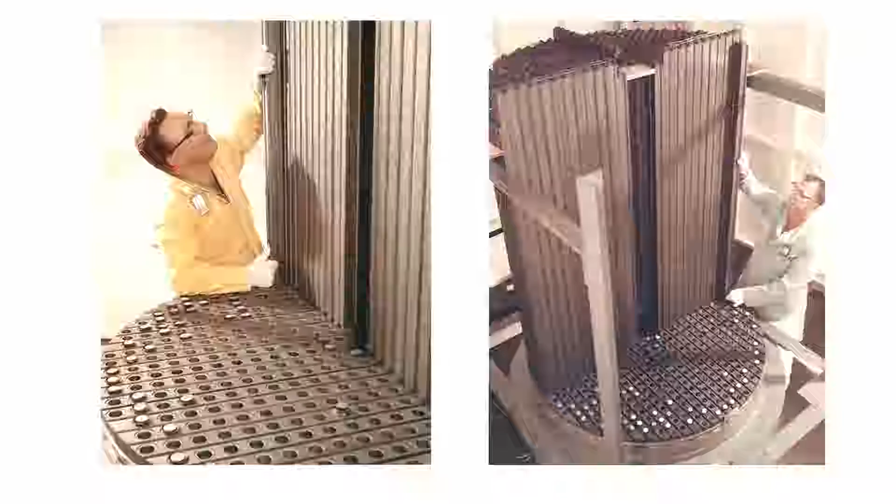This is an old facility. Look down before you walk. That's our biggest hazard here right now. Oh my goodness. Yes, yes. I've modeled this shape neutronically. It is like a lead pencil, isn't it? Yeah, it is. Basically. Graphite.

We just returned from a trip to Oak Ridge National Laboratories, and one of the exciting things that the Baroness and I got to do was to tour the Molten-Salt Reactor Experiment, which was one of these type of reactors that was built in the 1960s. It was an experiment that demonstrated many of the key technologies, although there are some that still remain to be demonstrated.

How long have you been here? I've been here since 1992. There are very few people in mid-career in nuclear energy right now because there's a huge trough. We have a large number of students coming back into it. Well, the context has changed completely, hasn't it? It has. Yeah, when we went into nuclear energy, they said, "What are you, nuts? There's no future in that." And it really didn't matter. We say it's the true believers.

So you could have a molten salt reactor that you could walk around on. Oh, this is so cool. You guys have got to try this. Oh, goodness, that makes you feel really weird. There's something in front of me here, it feels like.

I was in 7th grade. I read an Isaac Asimov story about the implications of what free energy would do. And I sort of knew I was going to be an engineer or scientist just from day one. And this sort of said, okay, what can you do to make a difference? And that was where I said advanced nuclear power was something that could make a difference, and that low cost clean energy could make a huge difference to society. If I'm going to have to get up every day for 50 or 60 years working on something, well, it ought to be something I believe in.

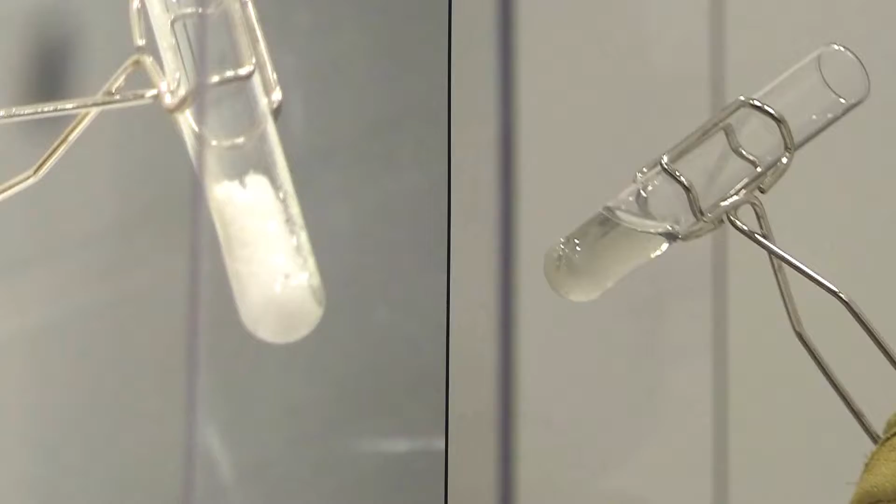Liquid salts are an outstanding heat transfer media. It really doesn't matter what you're going to be transferring heat for, whether this be a solar power tower, a salt-cooled reactor or a molten salt reactor. Viscosity on it is 30 times larger, but water's very low viscosity, so it's still a very low viscosity fluid. Some people might imagine this is quite a gloopy or slow-moving liquid, but it's actually quite fluid. You're right. It does go through a melt much like a glass as opposed to water, which doesn't quite do that. So we want to run it 100 C or so above this, so it does flow nicely.

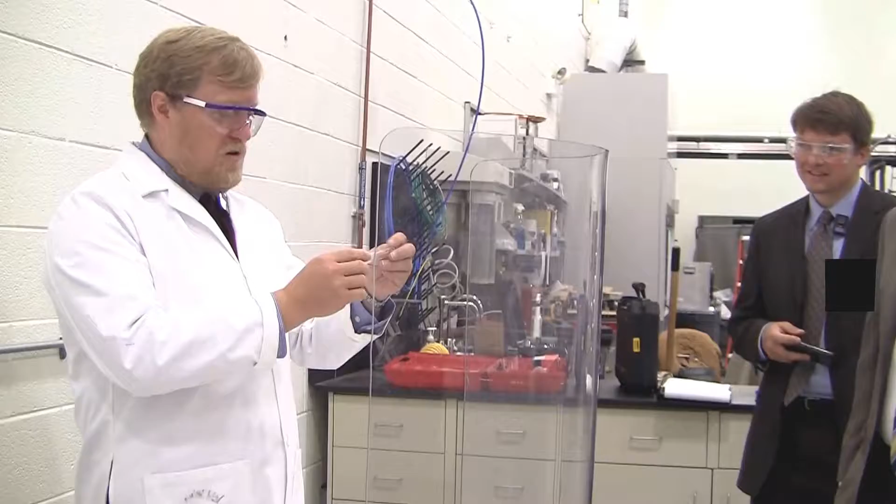If you repeat doing things in here, you can see you start to etch the glass just a little bit. So what we have to do in a reactor is keep things very highly reducing. If you put extra beryllium in there, it's essentially giving you a preferred spot to rust. And so this is all about controlling the potential corrosion of the salts within any vessel that you put it in.

Yep, the iron in some of the alloys is more soluble at higher temperatures, and so in your heat exchanger where it's at hot temperatures, you will get metals taken into solution, and then when it gets to the colder end, it'll redeposit, and so you can self-plug your heat exchangers, which you would very much like not to do. And your technique to avoid that is keep everything very well reduced so it doesn't corrode in the first place. You'll make it lousy, but there are no strong chemical reactions that are going to take place between the salt and even direct contact with water.

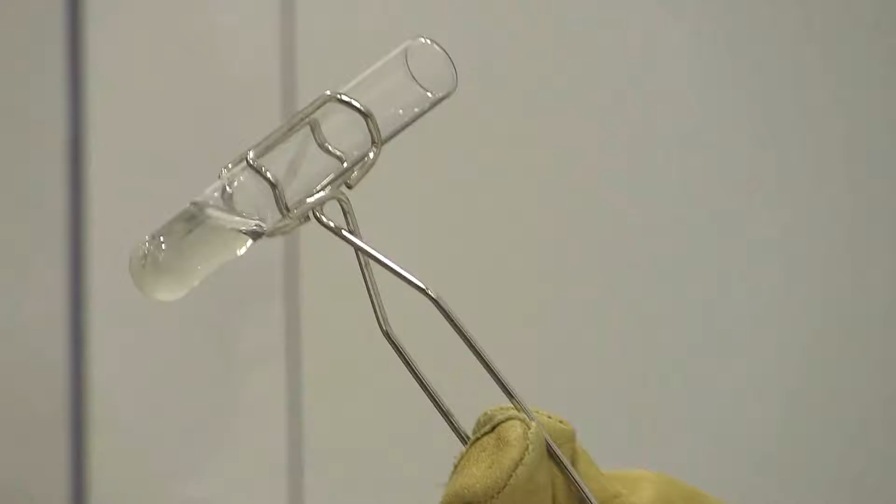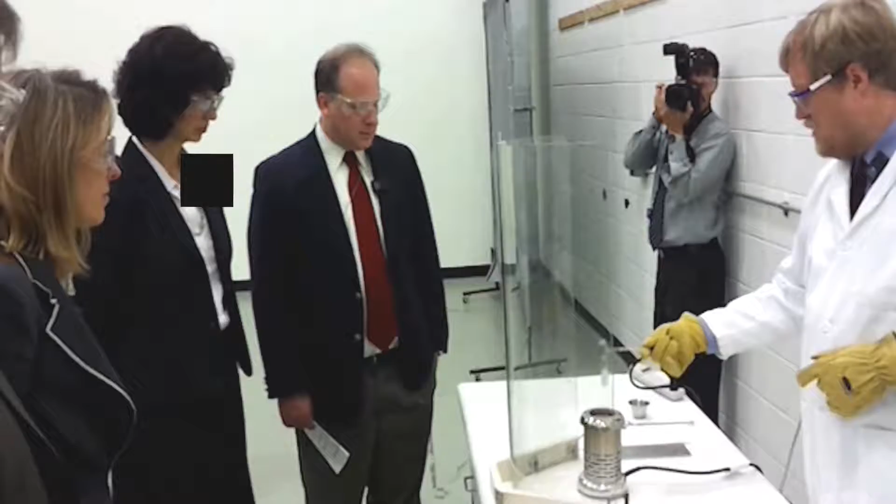The hazards on this are the same thing as hazards on a deep fat fryer, which is a trip. Throwing hot oil, or hot salt in this case, on visitors would be considered a bad thing. But there's nothing else to this, it just makes a nice little clear liquid. I'll just pour this out into a little stainless steel crucible, and you could hear that little snap there was a little bit of moisture at the bottom of the stainless steel.

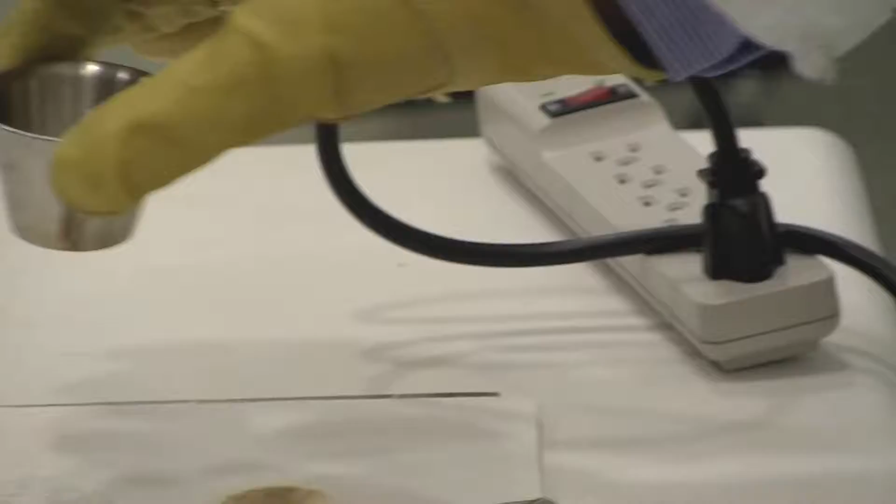I mean, at 450, this thing is a solid. So it doesn't take very long for it to form the solid again. Isn't that a nice feature? If you had a little crack on this and it was starting to weep, it forms a plug. Self-plugging. That's a nice thing, not being under pressure. On the other hand, if your design keeps the vessel hot, it'll stay liquid, but that's why you have a guard vessel. If the absolute worst case happens and you have massive vessel rupture, well, you still catch it.

The Navy program that led to the light water reactors we have now was well optimized to the needs of the Navy. It actually wasn't very well optimized to the needs of power production. The reason we have that as the base for our power reactor technology today is because the Navy was prepared to pay the first mover costs to make one work. And once you've done that, it's extraordinarily difficult to compete with it because those first mover costs are very, very high and have no financial return associated with them.

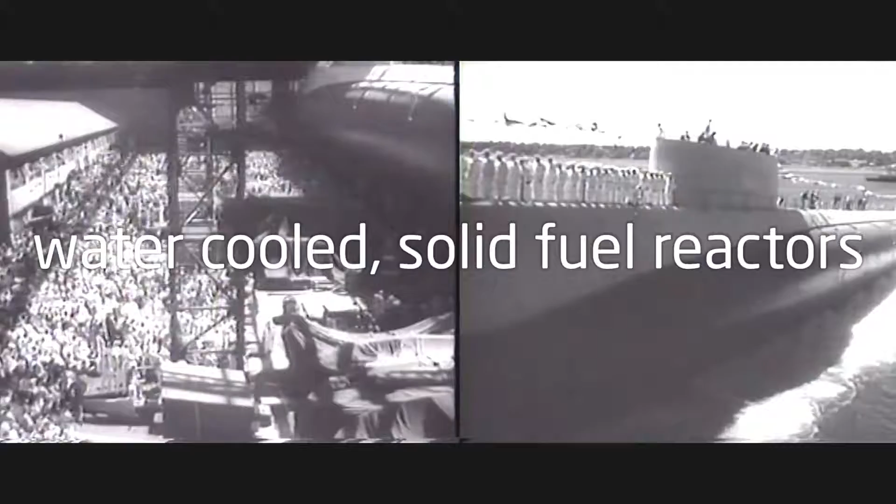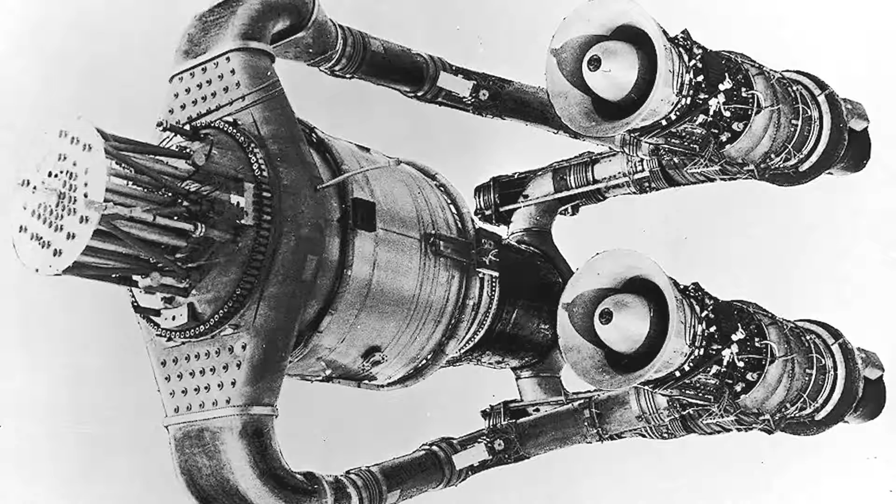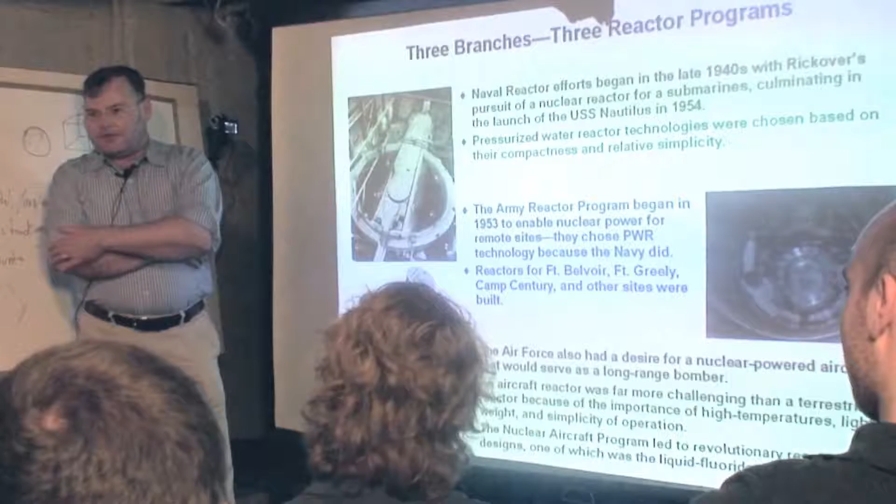The Navy has built their nuclear submarines, and the Army has taken the same technology as the Navy, the water-cooled reactor, and they're doing their thing. But the Air Force wants to build a nuclear-powered bomber. Now, Weinberg was a practical man, and he said, nuclear-powered bomber, that is probably a really, really dumb idea. Dirty little secret was that most of the people involved in it knew from the get-go that it really wasn't practical. In contrast to a submarine where you've got limited space, but you can shield it for the people on the submarine, it's much harder on an airplane because of the weight.

Most of us did not really think that the aircraft reactor really could work. But we did feel that there was a very interesting technology there that someday could be applied. And I would maintain that Weinberg was absolutely right in his assessment of the situation back then. He knew that to make the nuclear airplane work, they couldn't use water-cooled reactors. They couldn't use high-pressure reactors. They couldn't use complicated solid-fuel reactors. They had to have something that was so slick, so safe, so simple, that operated at low pressure, high temperatures, had all the features you wanted in it. They didn't even know what it was.

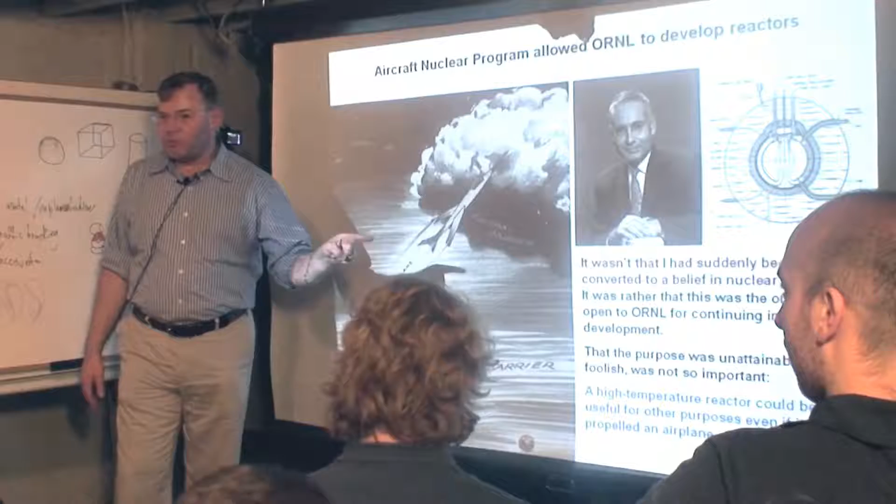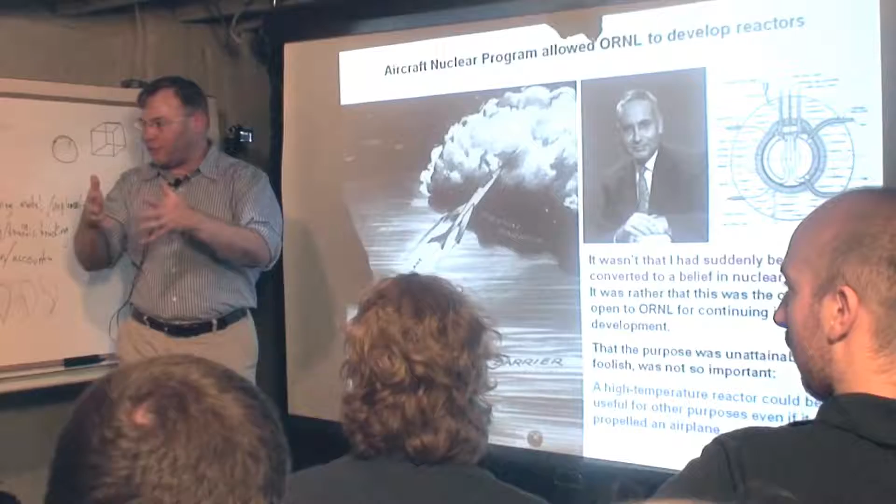I think someday this will be looked at as one of the great pivot points of history, that if this nuclear airplane program had not been established, the molten-salt reactor would have never been invented, because it is simply too radical, too different, too completely out of the ball field of everything else for it to be arrived at through an evolutionary development. It had to be forced into existence by requirements that were so difficult to achieve, and the nuclear airplane was that. So they began working on this high-temperature reactor.

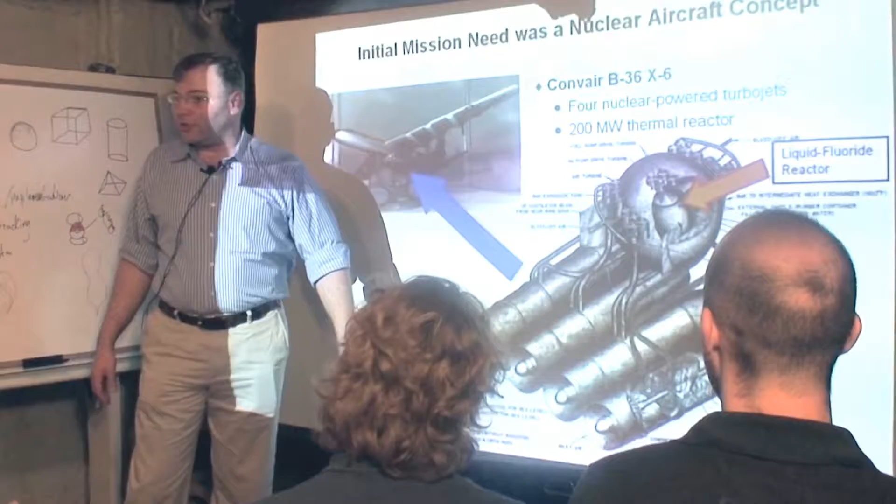And remember, this was invented before we had ICBMs or anything like this. This was a doomsday weapon. If you're flying this thing to Russia, it's the end of the world. I suppose you'd have to say that it was a miracle that the homogeneous reactors operated at all, rather than that they operated well. Chemical stability of the system was not really sufficient. It was chemically unstable. The second reactor actually operated very well. That was the Molten-Salt Reactor Experiment.

There it is. This is the place. These things right over here are the spent probes. Those things would extend to like 60 foot in length. They went down the tank, did the melting, did this bubbling and stirring and everything. A lot of them started above the high bay. When you say high bay, it's taller and we can put cranes in because we can lift things up. You had to go down an additional 25 to get to the top of the tanks. Then you had to go inside the tanks.

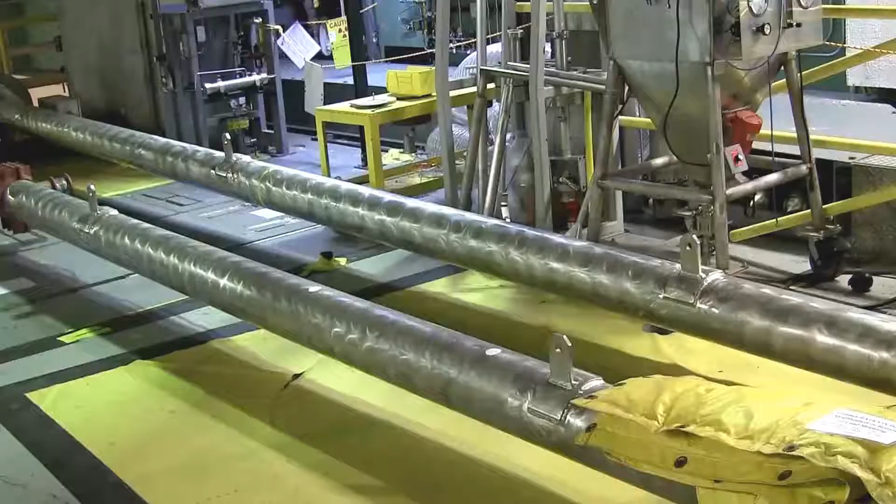So those things would extend. So you got a pipe within a pipe. The box is the top part of the probe. We had the controls. We could tell exactly how far down the probe was moving and the weight of it. And the probe had heaters on the end of it. Then it would melt a pool in that salt and would sink down in it.

So all those long-handled tools they had for operations, it was almost heroic actions, you'd say, when they were trying to do things. And you've got this length of distance, and we'd certainly try to design things today that could be robotically handled. It just would not be designed the same way as it was at that point.

One of the things that I've learned from talking to some of the old-timers at Oak Ridge, I mean, these guys are in their 80s now, if they're even alive, people didn't disbelieve that we could build the machine. They didn't believe that we could maintain it.

Operation of the MSRE was not too difficult, and the people that I had working for me, they all had hound dogs under the porch, old cars out in the yard that didn't run very well. If anything came up on the side of the molten-salt reactor, they said, "We'll fix that." "How you gonna do it?" "I don't know, but we'll fix it." And they did.

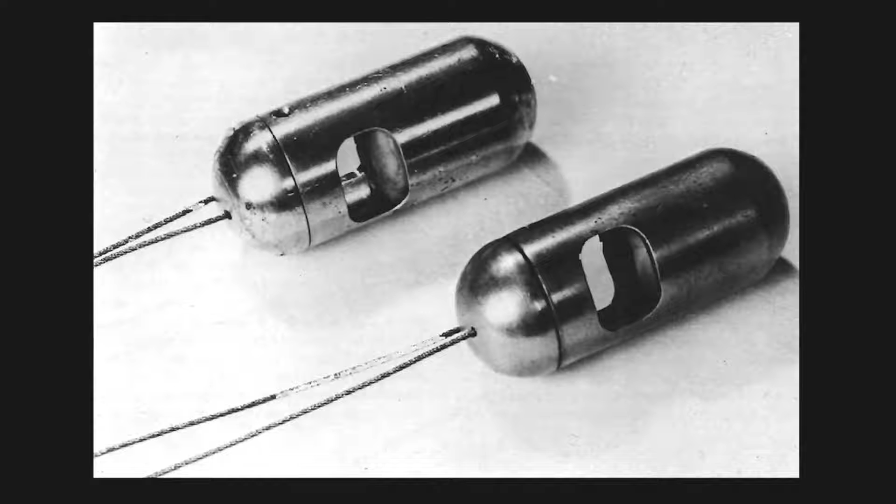One time, the sample capsule is down in the pump. Flexible steel cable got tangled up. It got bad news. Here's the end of that cable cut off. So I said, what are we going to do? And there's the good old boys for you. They said, isn't there such a thing as fiber optics? There's the capsule. And they fished that capsule out. We were back in business. And they had a lot of long-handled tools, remote cameras.

It was challenging, but he felt like, despite the challenge of operating in high radiation fields, they were able to operate and maintain that machine over the course of its lifetime. We worked for several years on an experiment that proved that you can handle this molten salt reliably, and when things go wrong, we were able to fix them. The advantages outweigh the difficulties, and the concept is ultimately going to be a practical application.

We still have a few folks who were even operators here who are around. Sid Ball's office is just literally three over from me. He was at the controls when it reached its highest power there. He told me that was an accident. It sure was. Yeah, there's another way to tell that story too.

I was running some tests late at night. The device that I was using got stuck in the wrong place and pulled the rod out, and the power went up and up beyond the design power, and then controlled itself and went back down. Wow. Everybody was happy.

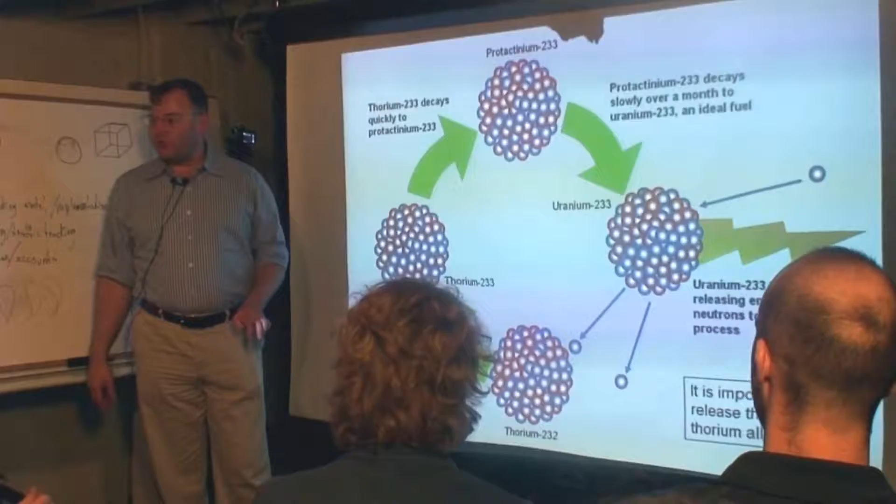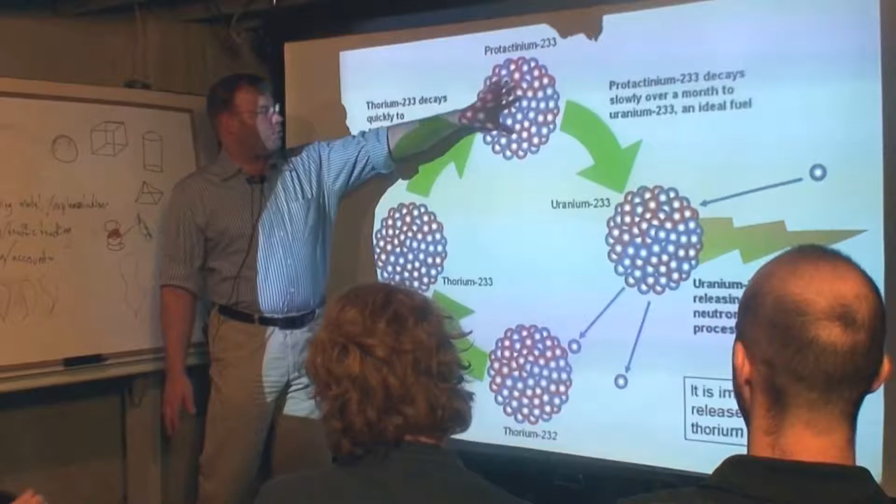Yeah. The basic idea is thorium all by itself is not going to release nuclear energy. But if you hit thorium with a neutron, the thorium will absorb the neutron and it will turn from thorium-232 into thorium-233. It's going to decay into protactinium-233, and then it will decay over about a month to uranium-233. Uranium-233, if you hit it with a neutron, it will fission. In addition to releasing all that energy, it will release 2 or 3 additional neutrons.

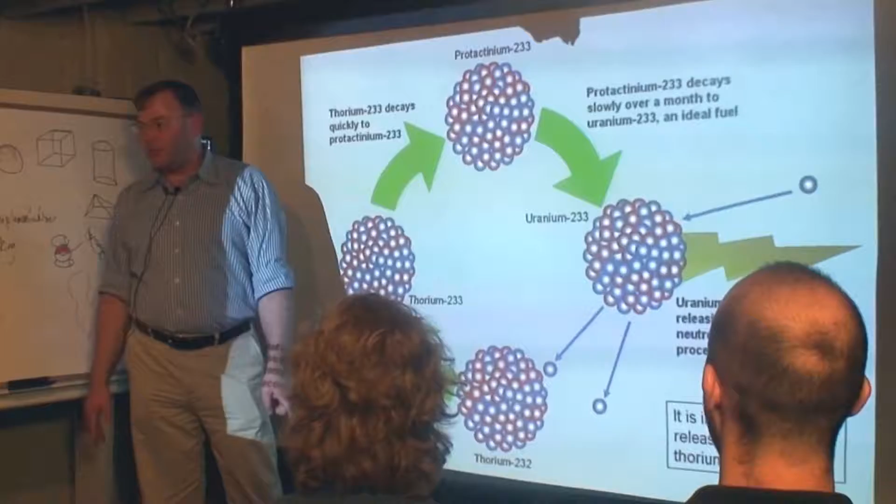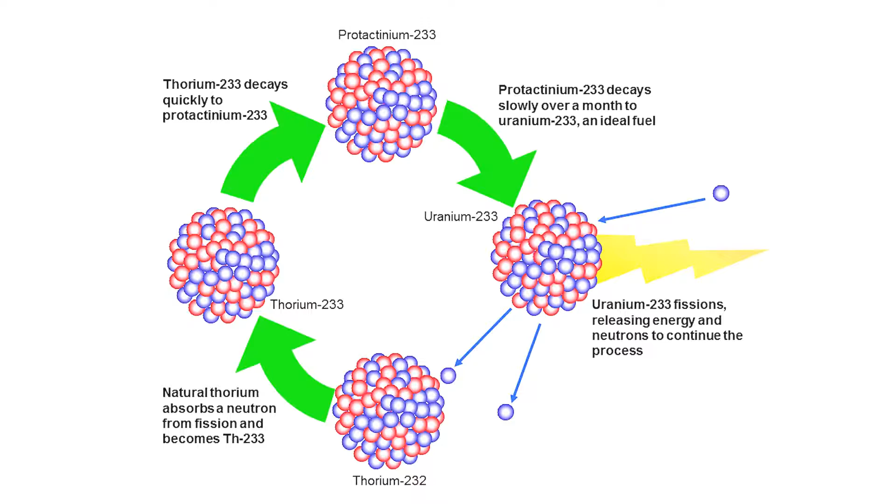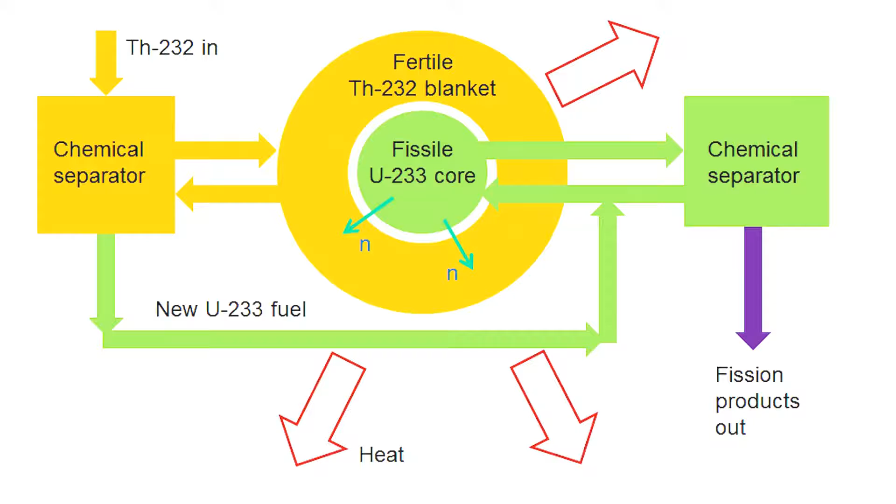All right, so you need one of those neutrons to go find another thorium, and you need another one of those neutrons to find another uranium-233 to continue the reaction. You're fissioning uranium-233, but you're making a new one. You can almost think about it as a pseudo-catalyst. If you had some uranium-233, you could catalyze the burning of thorium indefinitely. So through this process, you can essentially implement that very simple thorium cycle, and this is what Weinberg and his team were working on in the 1960s. The Molten-Salt Reactor Experiment was the core.

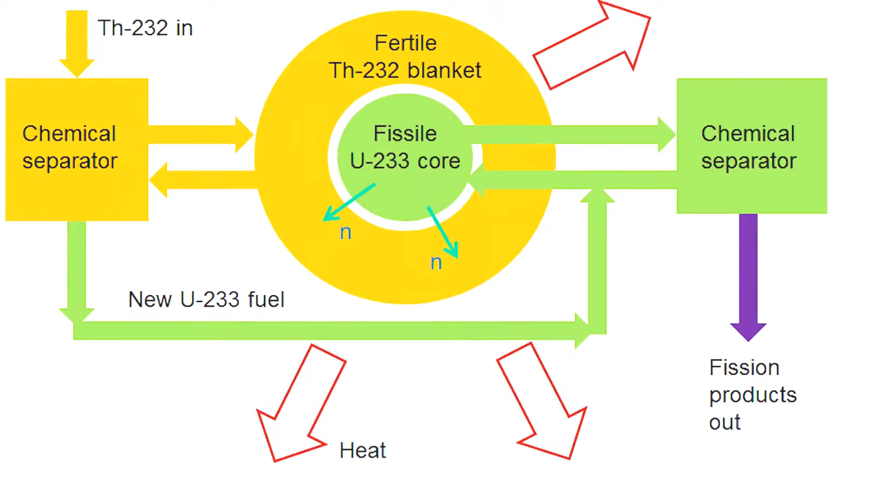After they completed the Molten-Salt Reactor Experiment, they went to the Atomic Energy Commission. They said, hey, gee, can we have some more money? We'd like to go now and build the real thing. We'd like to build the blanket, and we'd like to hook a power conversion system on and make electricity. They felt like they'd shot the moon. Well, the Atomic Energy Commission, unfortunately, did not share their zeal to continue with the technology.

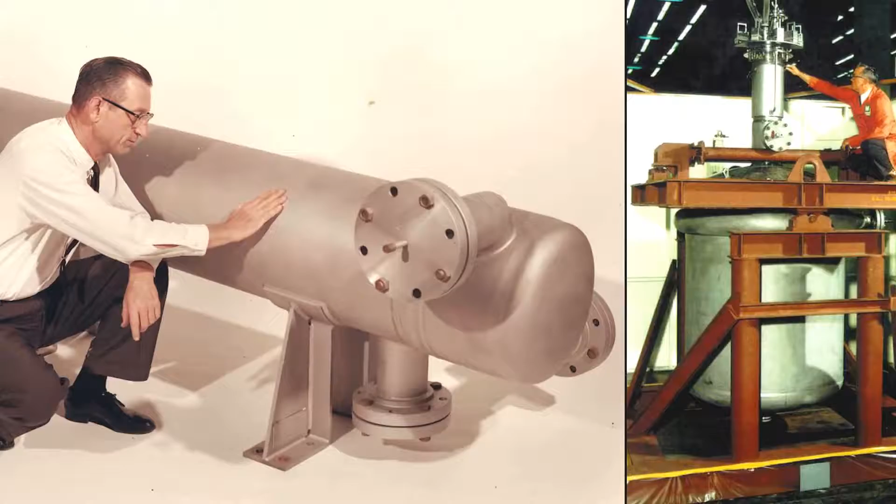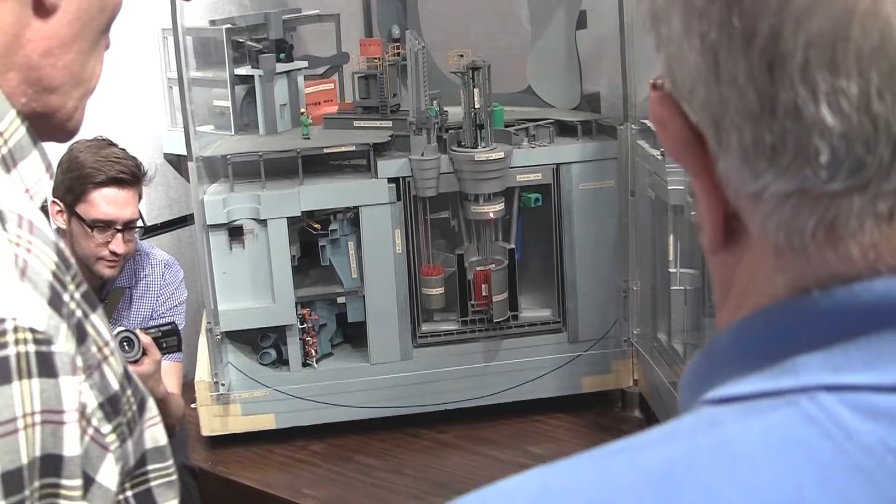Milton Shaw, who was the head of reactor development in Washington, called up Alvin Weinberg and says, stop that MSRE reactor experiment, fire everybody, just tell them to clear out their desk and go home, and send me the money for fast breeders. Milton Shaw was sold on the sodium-cooled fast breeder reactors, and I am not familiar with why that was.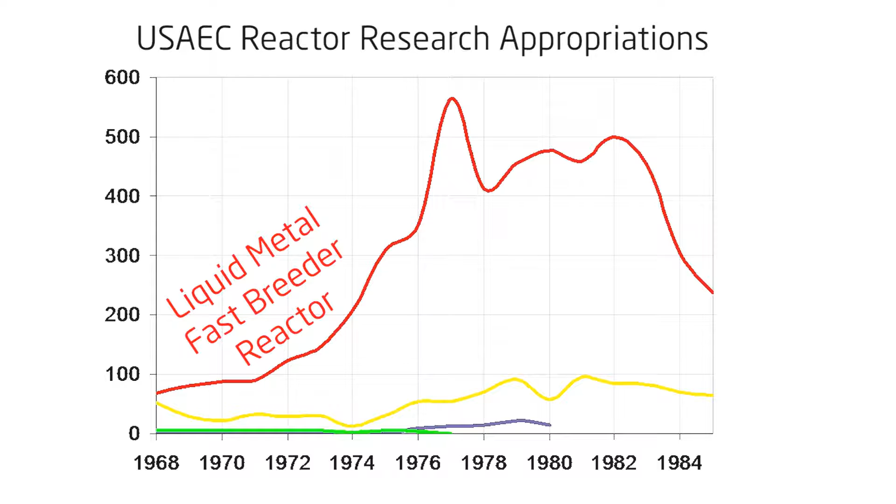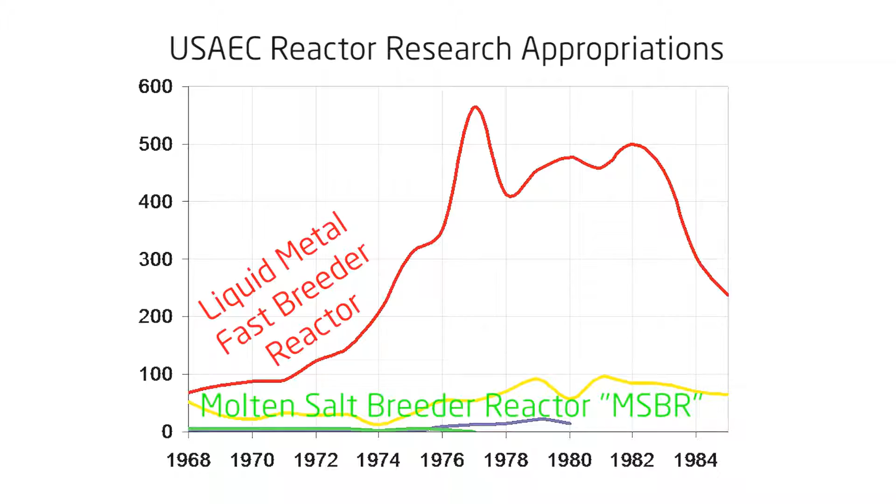The red line shows the expenditures on the liquid metal fast breeder reactor. And this graph only begins in 1968. At that point, the United States had already built several liquid metal fast breeder reactors. It's very hard to see the green line for the molten salt reactor technology. It's extremely low. And then ultimately it was canceled. We were competing with the fast breeder people at Argonne mainly. They just had more political sway than the molten salt reactor.

Do you see a prevailing opinion here about molten salt reactors? We haven't been funded to look at molten salt reactors. There's no opinions about... the opinion is simple. Build IFR, that's it. Okay, that's the opinion. Okay. The problem with the MSRs is that they've never done it. They had one at Oak Ridge for a little while. Yeah. They went through and did a couple of little tests.

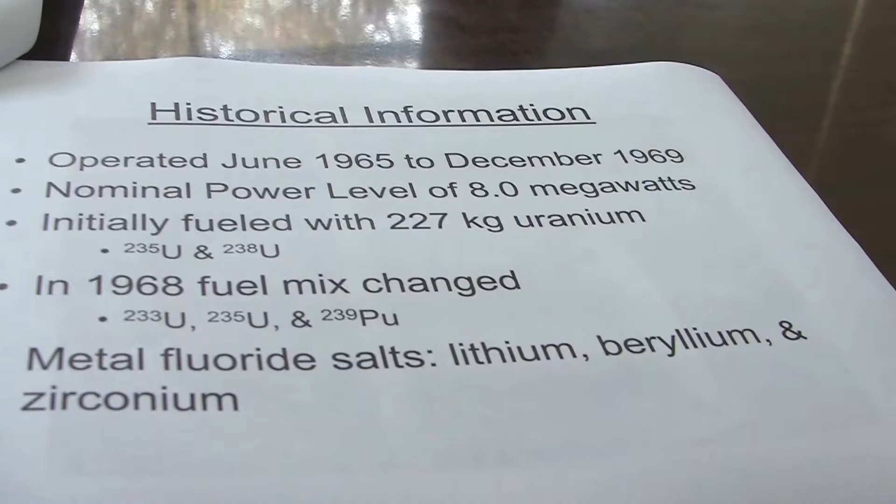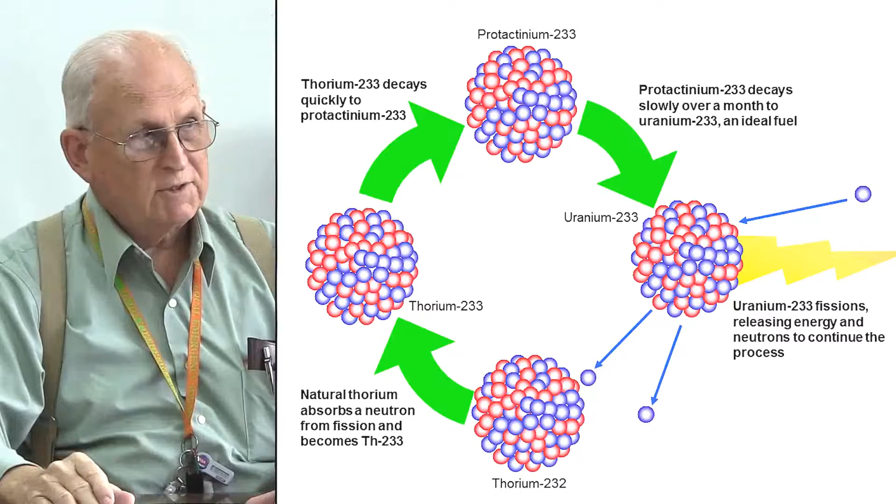We realized that we were minor league money-wise compared to the other programs. U-233 was tested here, and there was a little bit of U-235 in it, and they added some plutonium-239 in that fuel mix. Do you know how much plutonium was added? Oh, about 600-700 grams. They thought the U-233 was the utopia of uranium fuel. Do you feel like the program had a sound technical basis, or do you feel like technical problems were the basis for cancellation?

Some of the technical reasoning that I heard for the cancellation was that there was a corrosion problem. Tritium was raised as another issue. We made no effort on MSRE to do anything with tritium, and there was a perception that managing tritium was going to be a very difficult, if not insurmountable, issue. This is the WASH 1222 report from the AEC.

Did the people on the program feel like tritium was an insurmountable problem? We recognized that tritium would have to be captured and sequestered for the system to be viable, but most people thought that that's something that we should be able to do.

Did the people on the program, particularly the chemists or the material scientists, feel that corrosion was an insurmountable problem on the program? No, and in some of the subsequent work, subsequent to that initial shutdown, they did some experimental work that seemed to bode very favorably for an ability to solve that issue. As well as the tritium issue, by the way, because we did do some tritium experiments in that 1974 to 76 period, and those are documented.

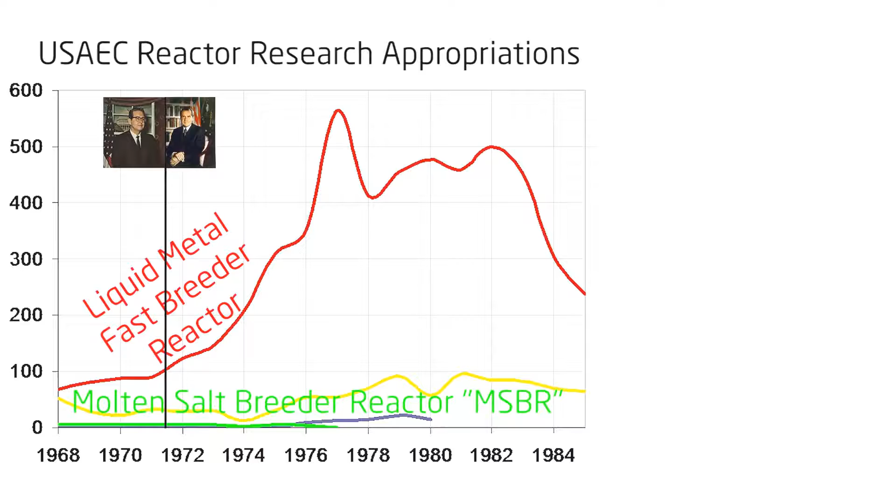Mr. President, since you missed our meeting on breeder reactor, we sent the message today, Craig. I told Ziegler to tell the press that it's a bipartisan effort. This has got to be something we play very close to the vest. But I am being ruthless on one thing. Any activities that we possibly can should be placed in Southern California. So on the committee, every time you have a chance, needle them, say, where's this going to be? Let's push the California thing. You do that?

Nixon was from California, Hosmer was from Southern California. Chet Holifield, who ran the Joint Committee on Atomic Energy, was also from California. It doesn't lead me to believe that the president was seriously considering alternatives to the fast breeder reactor and other paths that could be taken. It was a focus on what can we do right now to get jobs.

The United States is going to go forward in building a breeder reactor. Now, don't ask me what a breeder reactor is. All of this business about breeder reactors and nuclear energy and the stuff is over my head. That was one of my poorest subjects, science, and I got through it, but I had to work too hard. I gave it up when I was about a sophomore.

Nixon, by his own admission, was not particularly well versed in the different types of breeder reactors.

Unless you're one of those PhDs, you won't understand it either. But what I do know is this, that here we have the potentiality of a whole new breakthrough in the development of power for peace.

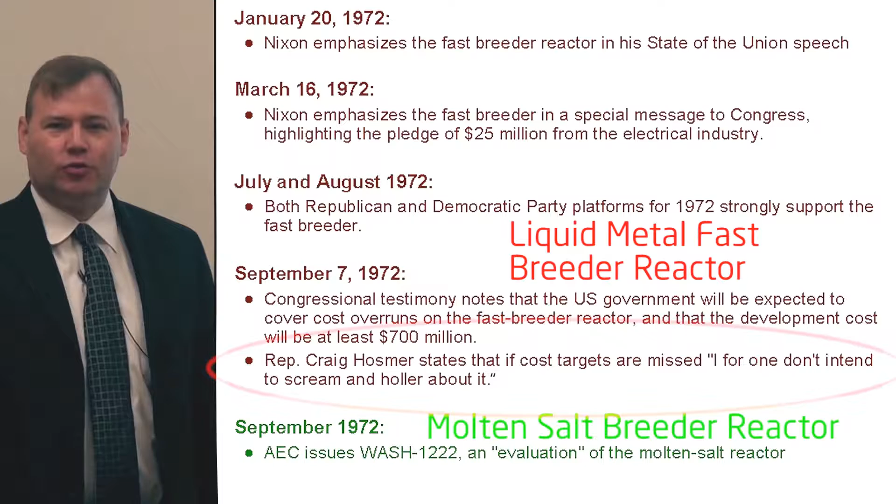Maybe it might have benefited our country a little more if Nixon had been able to ascertain the different values of different types of breeder reactors and why one might have an advantage over another. Representative Craig Hosmer, who was the fellow on the phone call that we heard earlier, said that if cost targets were missed, I, for one, don't intend to scream and holler about it. So it's not hard to see that they could see great economic benefits accruing to their area of the country.

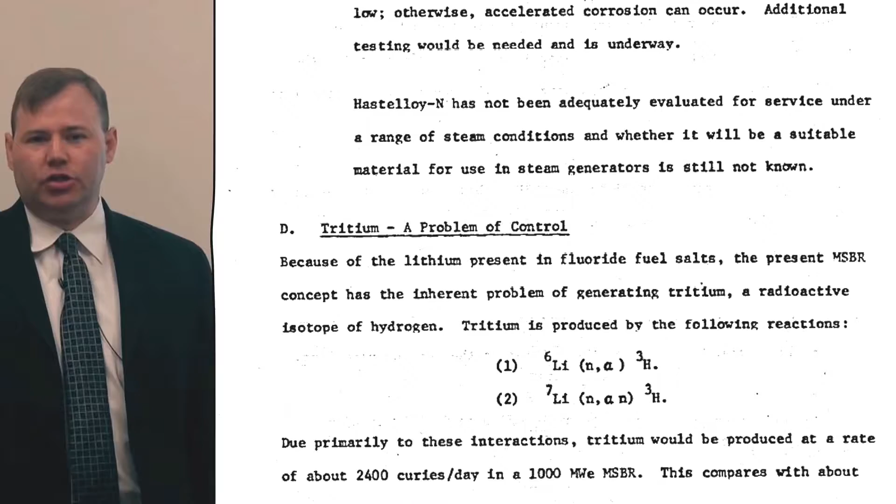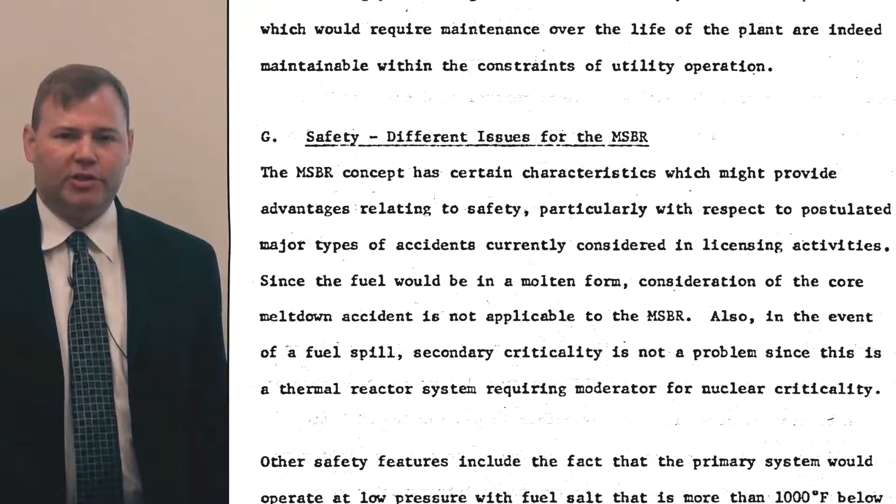In that same month, the Atomic Energy Commission issued WASH 1222, which was an evaluation of Weinberg's molten salt reactor. It was highly critical of several technological issues that had been encountered during the development of that idea. More importantly, though, it almost completely ignored the safety and economic improvements possible through the use of the molten salt reactor technology. This was the main focus of Oak Ridge for decades, and it was very abruptly cut off, and it was a very bitter pill to swallow for them. So a lot of these great minds, they thought their life work had kind of gone to waste.

The original shutdown came early in 1972 with a letter from Mr. Shaw that says, "Thou shalt stop right now." One anecdote that I heard, he said, put your hand on your desk, take everything that has to do with molten salt, sweep it off, and you're finished. I saved all my documents. I did too.

So you had this geographically isolated place with a huge body of concentrated molten salt knowledge that never got out. We had a corpus of people in Oak Ridge who knew how to do this in the mid-1970s. They're literally dead and gone now. People that worked on the molten salt reactor would come back and then they'd get shut back down. They come back and they get shut down. A lot of people got burned out from that pattern. I've met a handful of them. They're in their 80s. They're not going to do this anymore.

What's happened to Paul Haubenreich and Beecher Briggs and those guys? Have you kept track of them? Well, Beecher's been dead for a long time. How about Paul? Paul, I have not had any contact with him, so I don't know. Quite a few of them are dead now. Well, that's true too, yeah.

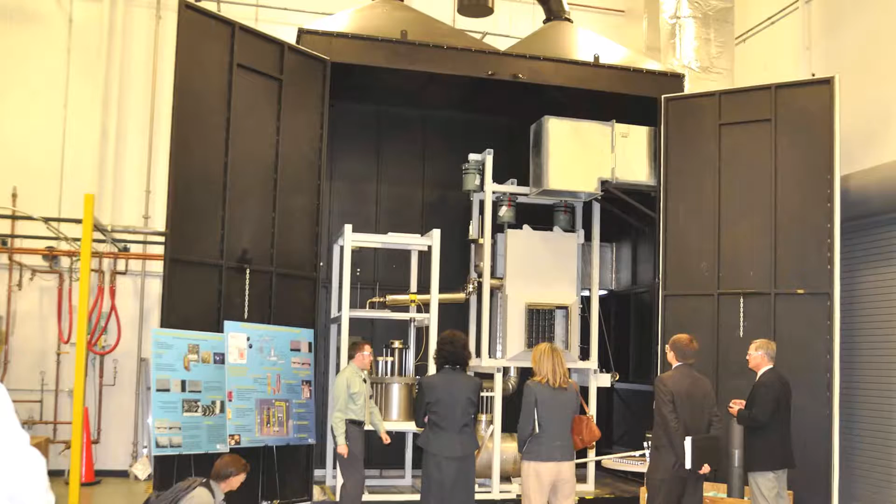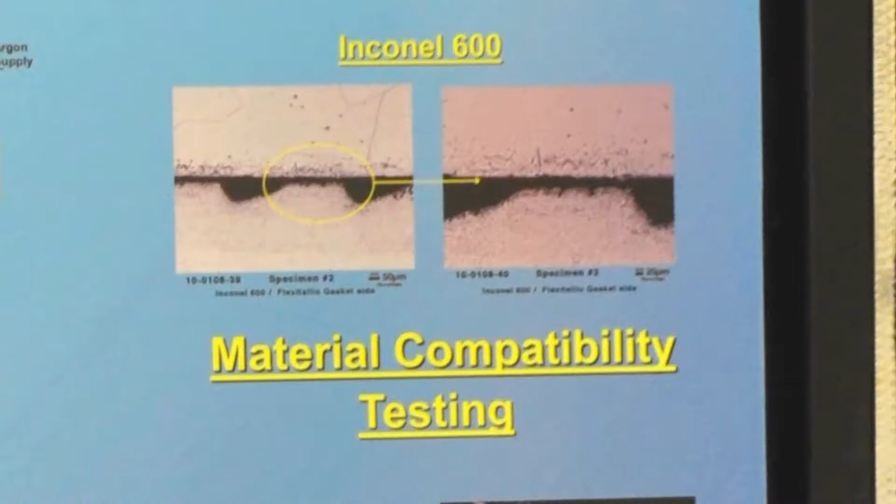We are trying to demonstrate some of the core technologies you have to make liquid salts a standard heat transfer material. The idea of this loop is to retain our expertise in using high temperature salts, to provide a platform for us to test different components, different reactor concepts. Above about 600 C, it becomes technologically very difficult to transfer heat effectively. The loop is designed to run at 700 Celsius, that's about 1300 degrees Fahrenheit. And the whole loop is made out of Inconel 600. Ideally for salts, you'd use an alloy like Hastelloy-N.

Right now you can't really get the right components, the right shapes using Hastelloy-N, so we use Inconel 600. It's maybe not the best option, but it's the economical and available option. This one does flow, so as the salt flows through it, it sends a sound wave through, and that measures the Doppler shift.

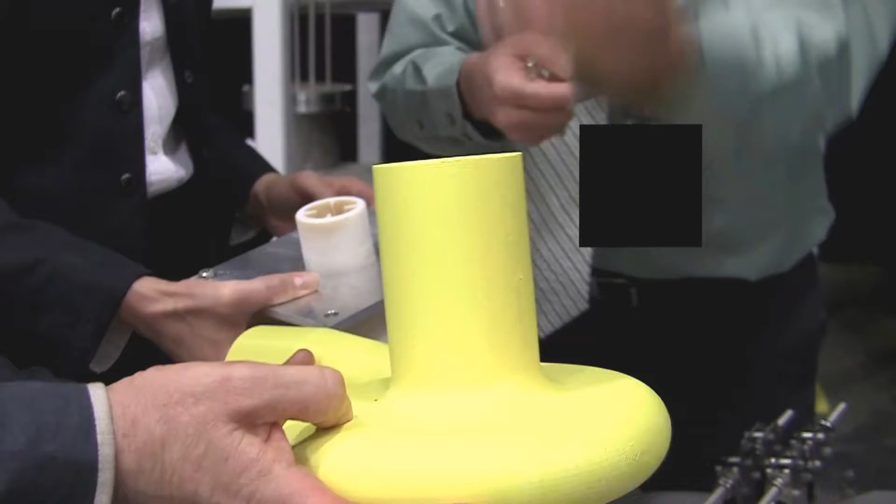Nice. So these are fluidic diodes. It's a way to control a liquid flow without using a valve. In normal operation, it comes in this side and out this side, and that creates a lot of resistance. It spins around and comes out. During an accident, the flow reverses and goes this way, and there's not a lot of resistance just flowing out here because it doesn't spin around. Then there's a heat exchanger. That's another part of the test.

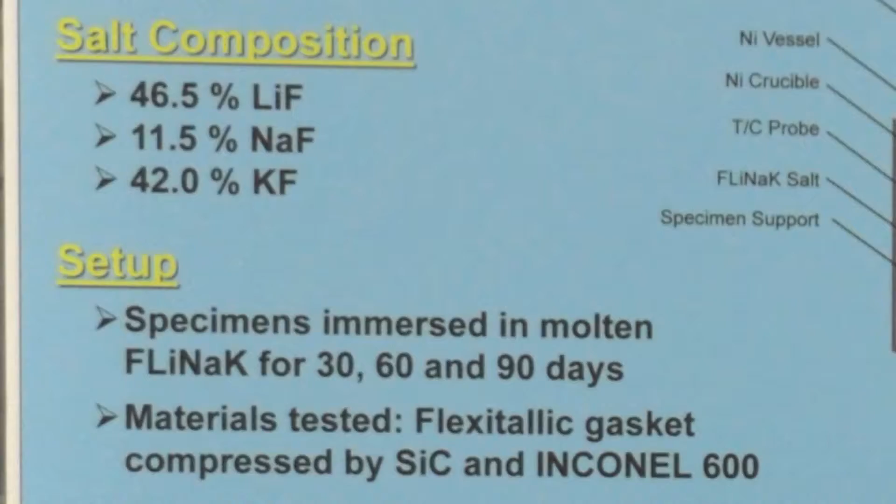Is all the heat localized on the pipes, or do you heat the whole box? Yeah, all the heating is either in the pipes or on the outside of the pipes. It's trace heated. You can see coils of heating tape. All the pipes will be insulated with about 4 inches of insulation. There will be a crucible here. That's where we'll initially load the salt, pass hydrogen fluoride and hydrogen through it, and that will clean out the oxides and the different contaminants inside the salt.

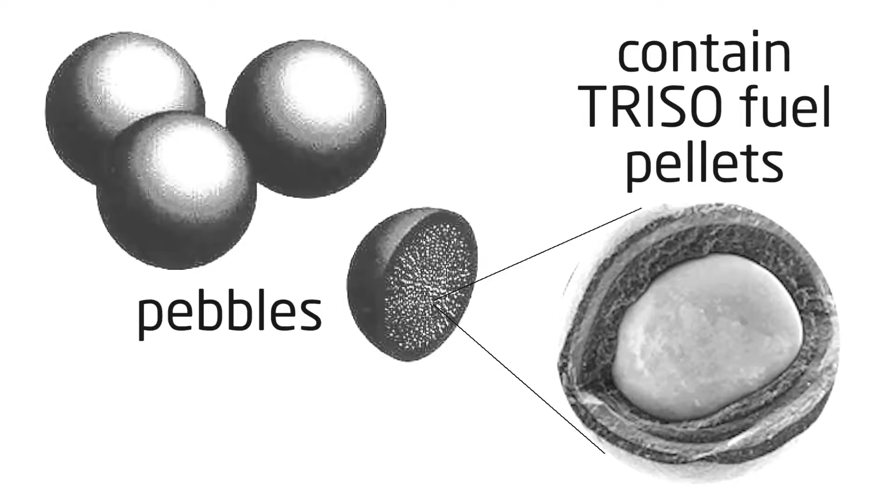So once the salt's clean, we'll pump it into the storage tank. The salt is allowed to freeze inside of it. That's an issue with salts where you can't have it just freezing inside of pipes, it expands, breaks. And the idea is we're testing a reactor concept where the fuel would be inside these pebbles, and we'll fill it up about this much, 600 spheres will be inside of it, and that's where the fission and the heat's created, and you got flowing FLiBe over it.

Can I ask what the theory was around using a solid fuel pebble in the FLiBe rather than dissolving the actinide into the salts? Currently in this country, we're not really looking at the molten salt fueled systems. Using a molten salt as a so-called working fluid, it is doing the job of transferring heat from one place to another. Molten salts have what's called a heat capacity, the ability to hold on to heat. They're great at it. In the example of your car, you want to move the heat away from your engine as efficiently as possible and then just disperse that heat.

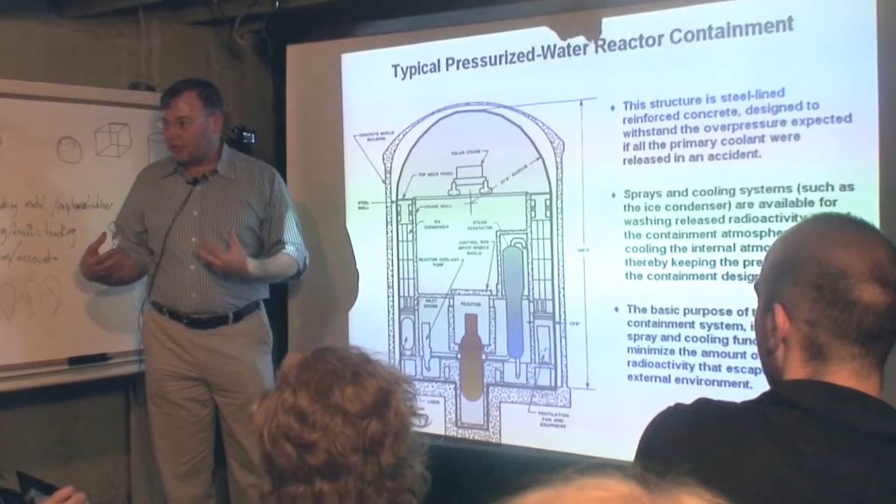Boiling point of water is only 100 Celsius, only 212 Fahrenheit. Don't ever open your radiator. Why? Because it's under enormous pressure. This building is the size it is precisely to accommodate this event. They've designed this reactor so if this happens, all the steam is captured in this building and doesn't get out. It's much bigger than the reactor, and that's all driven by that 1,000 to 1 difference in density between steam and liquid water. The boiling point of a molten salt, however, could be 1,000 or 1,500 Fahrenheit, depending on the type of molten salt. They do it at 1 atmosphere of pressure.

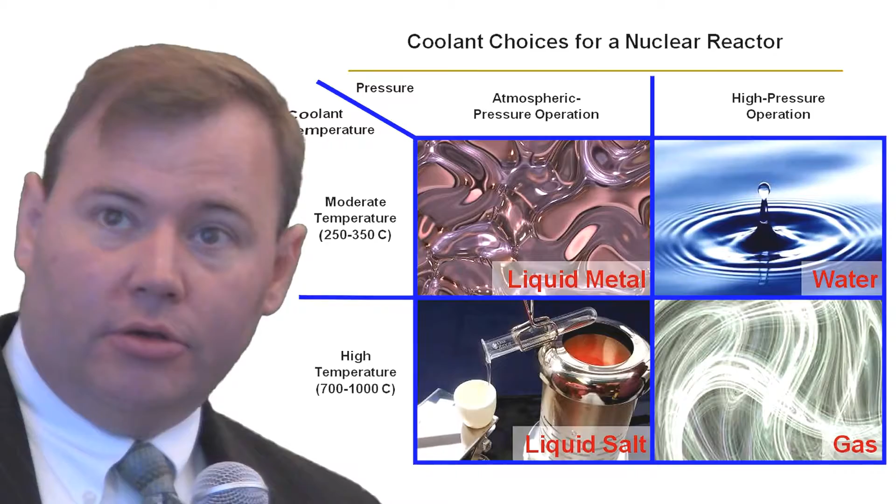Visiting the potential coolants, water is the one most commonly used. It operates at relatively low temperatures and very high pressures. That's exactly what we don't want. We want to operate at low pressures and high temperatures in order to achieve high thermal efficiency. Gas can operate at high temperatures, but it has to go to high pressure. Only the salts appear to offer the potential to go to high temperatures at low pressures. And that's a unique combination.

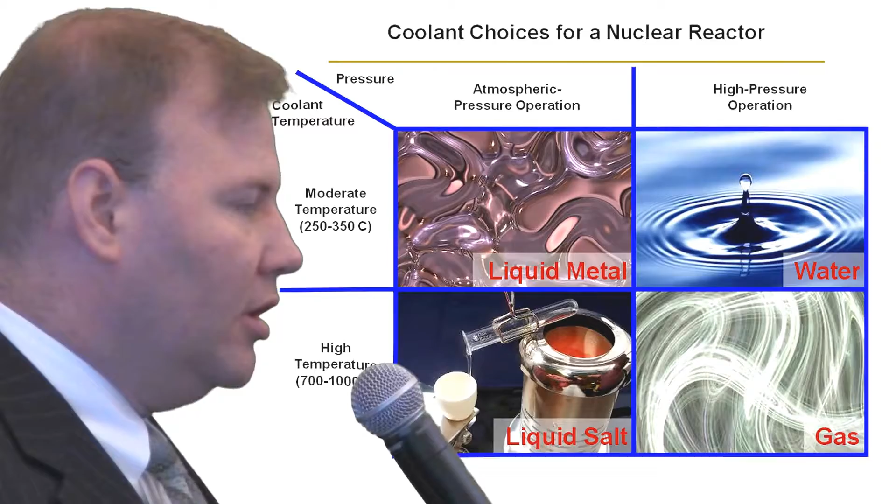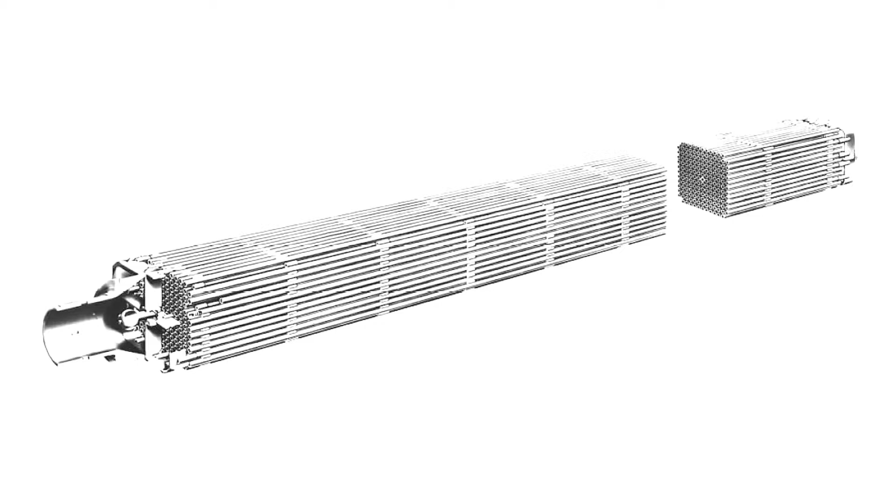Using a molten salt as a working fluid to move heat around is excellent, because you want as much of that heat as possible. Now, fluoride salts can also contain nuclear fuels like thorium and uranium, and that eliminates a major cost of what we do today in nuclear, which is to fabricate nuclear fuels. Let me talk about today's nuclear fuel. They take these fuel pellets and slide them down these zirconium tubes, segregate the pellets along the length of the fuel assembly according to enrichment. They'll put the most enriched ones in the middle, and then decrease the enrichment along the length of the fuel assemblies. It's a ceramic.

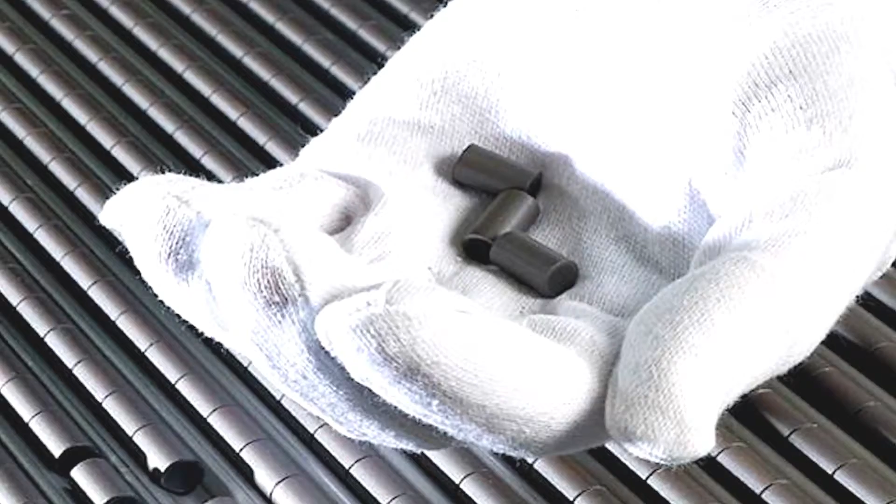It's a lot like the stuff your coffee cups or your cooking ware is made out of. Great at going to high temperature, but not thermally conductive, and so it gets very hot along the center line of the fuel. This stuff has about the cross-section of a pencil, but between the center and the edge there will be like 1,000 degrees of temperature difference. That puts enormous thermal stress on the material itself.

You can't even come close to 100% burn. I mean, not even approaching it. If it gets too damaged, it's going to breach the cladding. It's going to let some of its fission products out. So you get very, very, very poor fuel utilization.

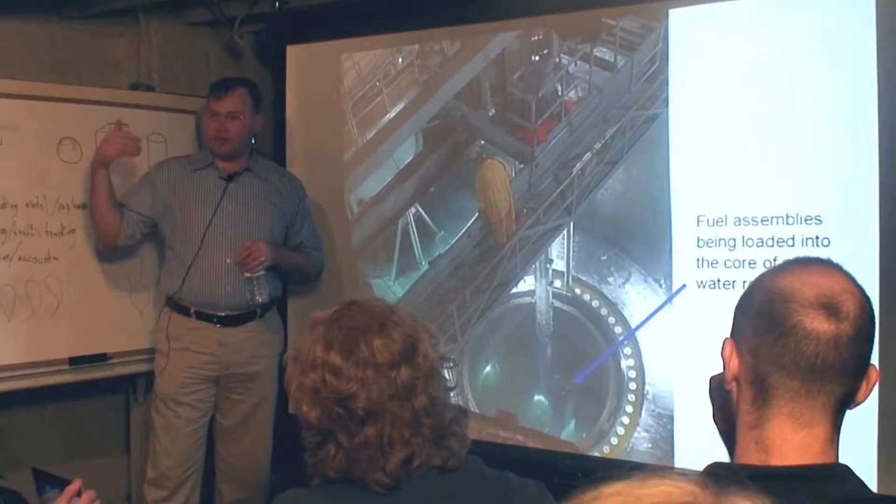And then if you remember when you went camping and you built a fire, it burns the hottest in the middle, and then the stuff on the edge isn't getting burned very good. They'll load in about a third new fresh fuel, and then they'll reshuffle the fuel that's already been in there. They'll move it kind of from the center out to the periphery.

All their money now is coming off fuel supply contracts. That's how GE and Westinghouse make money on nuclear power today. They don't build reactors, they sell fuel. Come along and say, hey, guess what? I got a reactor. It's got no fuel fabrication to it.

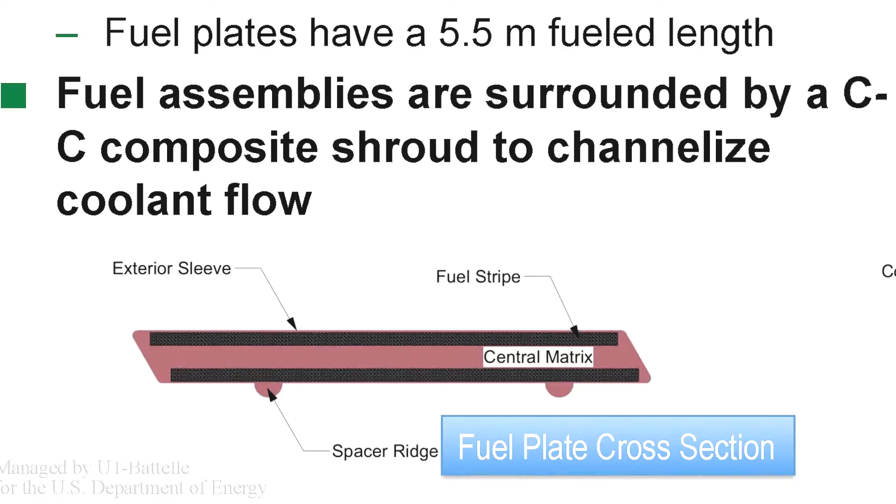The U.S. is electing to go after a salt-cooled reactor at first. Our method of rejecting heat is into the coolant. What we have are planks, about 25 millimeters thick. You could put whatever kind of test you can imagine in this area; we could put a solid plated fuel in. That test section can be replaced and others can be put in. So if you're looking down from the top, there are 18 fuel assemblies arranged in a hexagonal grid.

In a solid system, you can't get into the bulk of the solid fuel. In a liquid system, you effectively have infinite surface area. It is not to say that the U.S. doesn't recognize that molten salt reactors have some very interesting, advantageous capabilities, but they are a more technically challenging thing to do.

What is easier? Running a liquid past a solid in order to transfer the heat, or having the fuel be a liquid and use that in and of itself? So I would argue that actually combining the two is easier. Sure, it's more chemistry, but so what? I'm a chemist. There are lots and lots of chemists on the planet, and a lot of them are a hell of a lot smarter than I am. So, go solve the problem.

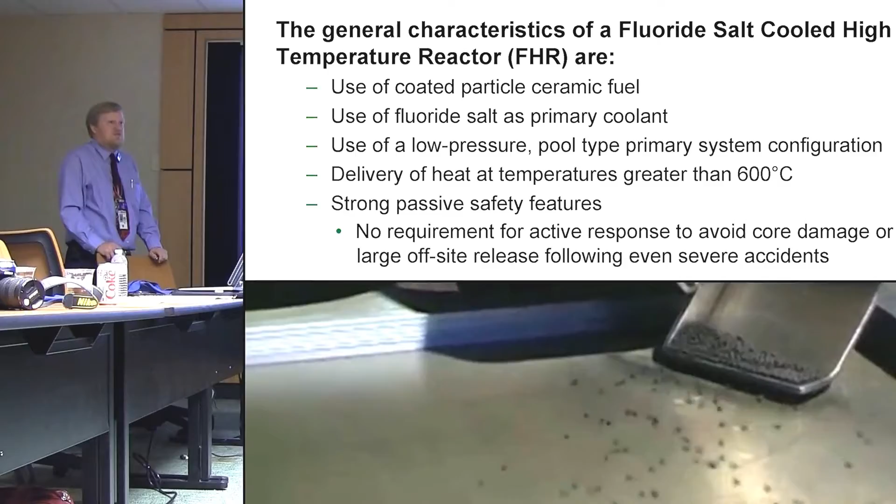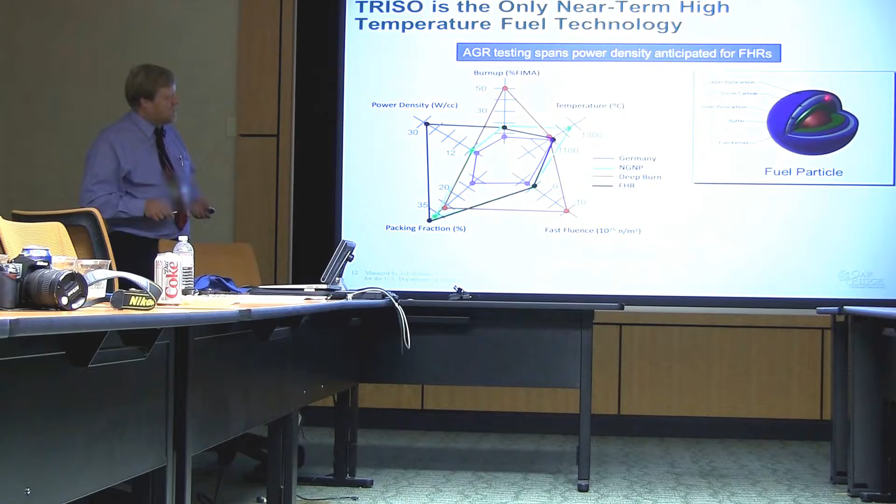It uses a fluoride salt as a primary coolant. It uses coated particle ceramic fuel. That's the TRISO fuel. This is the TRISO. Essentially, these are small kernels. They're smaller than a millimeter. We've got the fuel in the middle, and you've got a multi-layer structure, and the important thing is the silicon carbide in here, which is actually a gas-tight containment.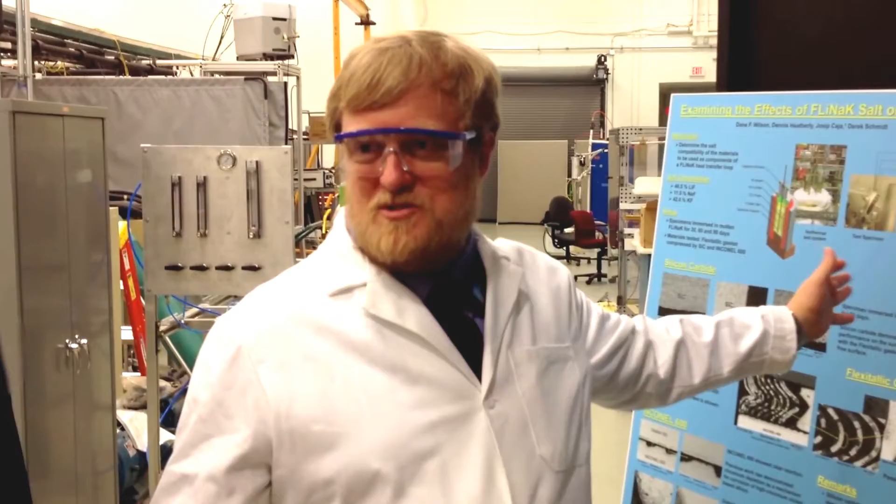And you just happen to hit the timing such that the induction power supply is out being serviced, the pump is out being serviced here. We're expecting by the end of September to have the loop pretty well ready to heat up.

They're not doing neutronic stand-ins the way China is. So what's the freaking holdup? They got the last guy in the world who knows how to make these different kinds of salts. We're not asking for our national lab to do miracles. We're asking them to basically replicate something they did in 1952 probably. Things went very fast in the 40s and 50s, not only because of the regulatory environment, but also because they were not developing commercial nuclear power.

They're developing it. Just get a reactor up, show that it works, do experiments. Nuclear technology is well beyond that now. It's commercial production technology, and so you have to do things differently than we did back then. If you wanted to just do an experiment, yes, we can compress the scale and we could have something running in very short periods of time, but that's not what we're looking for now. We're looking to be a preferred source for energy for the nation, and that takes more time.

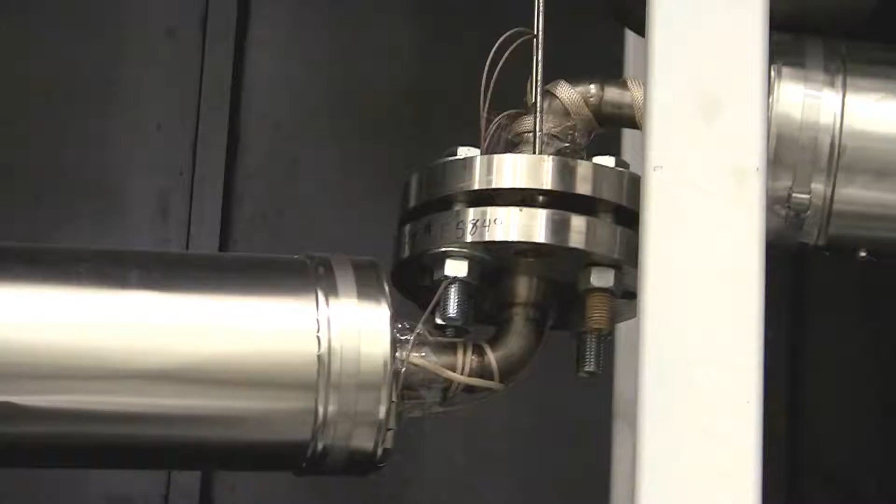Back when they were developing the molten salt reactor, they had numerous loops that were not fueled. These range from natural circulation test loops, to material testing, to pump systems like this. Most of the technologies for a molten salt reactor, as far as the thermohydraulics, are identical. So they're all very relevant, yeah. There are a number of technologies that have never been done before in salt. That rotating flange up there with gasketed seals, the fact that we've got ceramic and metal pieces in a single loop. Tons of stuff you're doing with FHR is in common with what we're...

I can certainly see that there are reasons for looking at thorium reactors as a follow-on and the true molten salt reactor. You have your conventional solid fuel with a liquid coolant, a fixed fuel form with a liquid flowing by it. Your pebble bed is a little bit of a transition in that the pebbles can kind of percolate up through, so you get some movement of the fuel. Then your next step is a slurry where you've got smaller particulate moving with the flow. And then the final step is actually just the fuel in solution. You can almost imagine a continuum with the pebbles just getting smaller until finally they're in solution. So each of these are steps towards a full solution.

Different reactor concepts that we're actually debating internally within the nuclear lab system. Do we want to actually build a prototype reactor that demonstrates some game-changing technology for nuclear? Yes, you do. Right. But it's going to be a major national commitment when you're talking those types of numbers, and there's nowhere near that level of consensus that this is the right path to take forward. And without building that level of consensus, we're going to stay an interesting technology option forever. We will never go beyond that.

We're funded through literally thousands of projects that come down from DOE and other government agencies where they say, we need you to go do this, we need you to go do that, and there's no line in the federal budget that says Oak Ridge National Lab, $1.65 billion, go do good things. So we need something now to add to our grid with clean nuclear power that's going to get us to these advanced designs. And that relies heavily on the established technology that was the light water reactor.

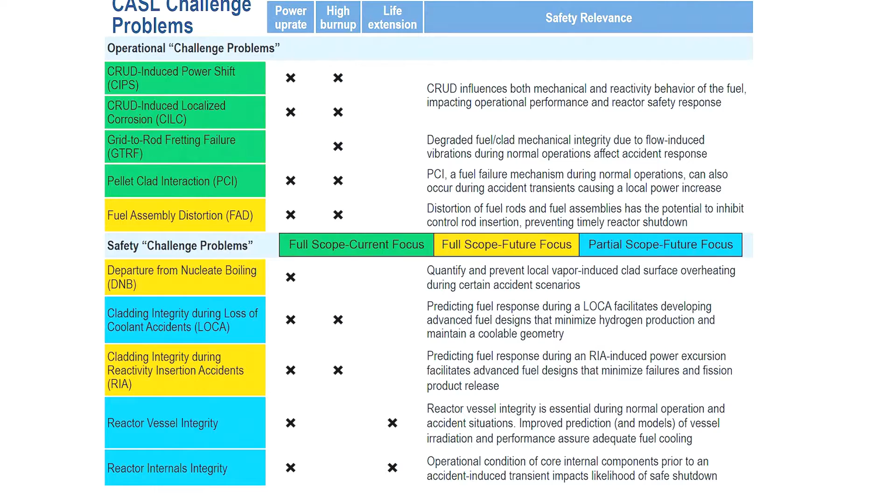The Consortium for Advanced Simulation of Light Water Reactors, CASL, is an effort to develop high-fidelity integrated models of operating reactors. We're focusing on pressurized water reactors, new fuels that are more tolerant and resistant to accident scenarios like loss of coolant, and cladding integrity.

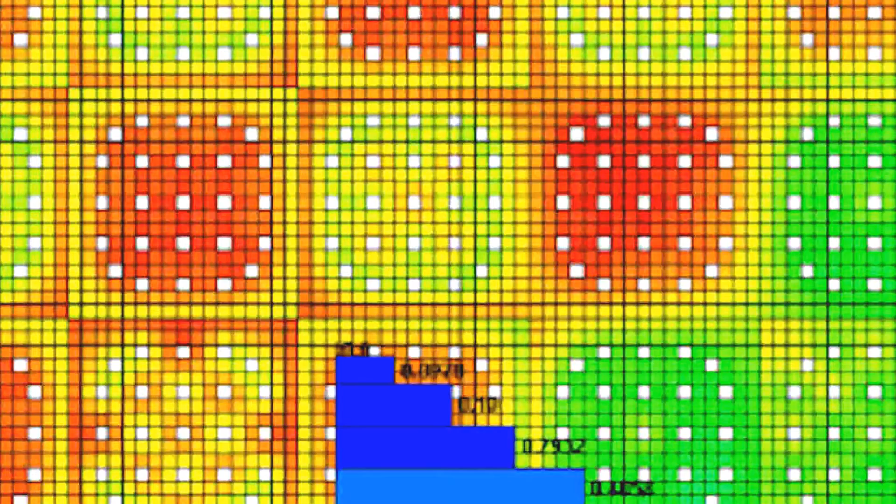Right, so you're modeling a physical system. So how do you know this is right? These white areas are control rod guide tubes. In the center of one of these is what's called an instrument tube, and they can run a fission detector down that instrument tube and get an axial power distribution. So we can compare that.

Could you talk a little bit about the versatility of this with regards to other reactor types, particularly MSRs? You've got to worry about a different type of coolant and different geometries, but you still have neutrons, you still have heat transfer, you still have structural mechanics and all that base technology. In fact, DOE said you must select and model physical reactors, show that it's relevant to actual operating reactors, not a design that isn't operating yet. But in general, the simulation technology we're putting together we expect to be broadly applicable to a large class of reactors.

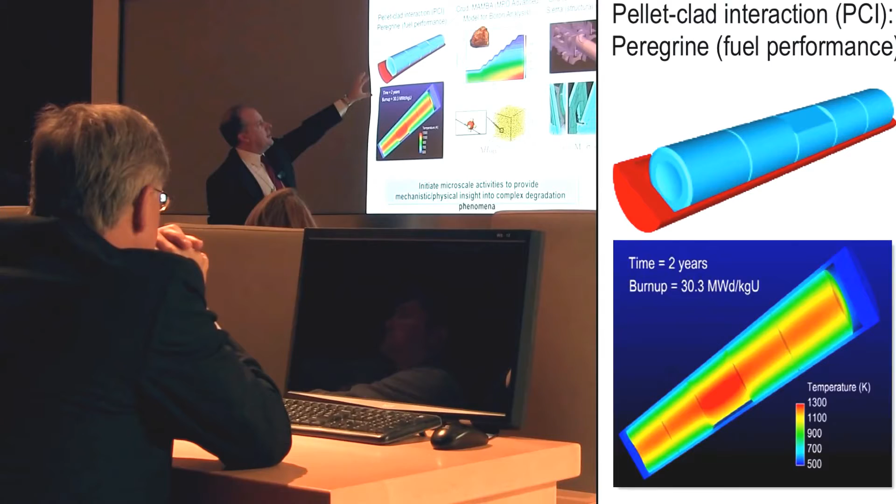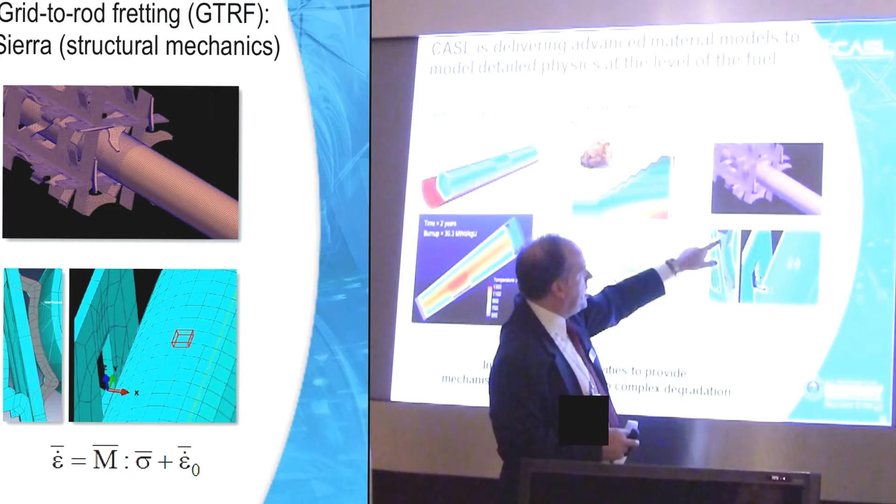This calculation here is looking at a fuel pellet that might have a chip in it, and what would happen if you operate with a chip in a fuel pellet, what would happen to the cladding and the stress on the cladding. This actually shows what holds the fuel rod steady. If you get a gap in here, the rod can vibrate and wear a hole. For the nuclear industry, for the most part, I think it's fair to say they're really not interested in novel concepts. They have problems today that they want some help with.

Some of the people that we were visiting with in Oak Ridge over the last few days were retirees who had actually worked on the molten salt reactor program. An issue that was repeatedly brought up was it's a very, very different kind of machine than what the nuclear industry is used to. Suddenly here were these young people showing an interest in their technology that they obviously had a real fondness for. There's now a whole bunch of people out on the internet following this, taking such an interest in their pet project that they clearly loved.

One of them said, "Oh, everything I worked on got cancelled." So they felt that perhaps their secret had been overlooked. But I think we're hopefully resurrecting it just in time. A filmmaker in Canada put out a request on Kickstarter, which is a way to raise funds over the internet, saying, "I'd like to make a video. I've done everything up to this point for about $1,000. I'd like to get $20,000."

When we told those molten salt reactor retirees that 600 people had donated $40,000 on the internet to make a video about their work, I can't even tell you how excited they were. Yeah, it was awesome. They looked at each other and said, "This sounds crazy, doesn't it?" And he was like, "Yes, I'm not sure these guys are telling me the truth."